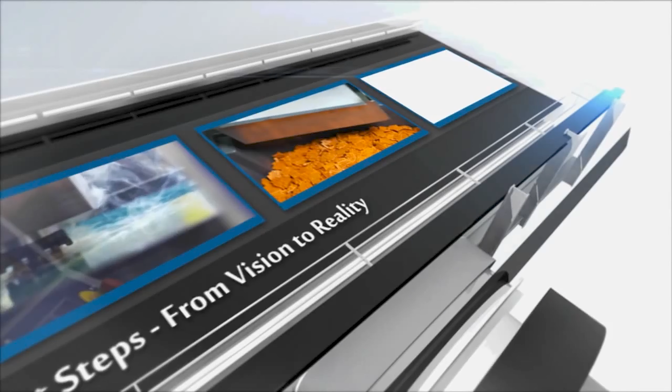Small and medium-sized businesses prefer the term evolution, as technical innovations arise every day in Germany. Innovations are the heartbeat of the German machine and plant construction industry, and Industry 4.0 is already commonplace in production. But let's start at the beginning.

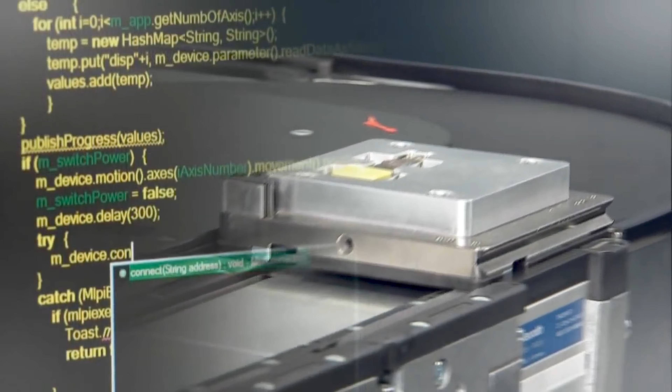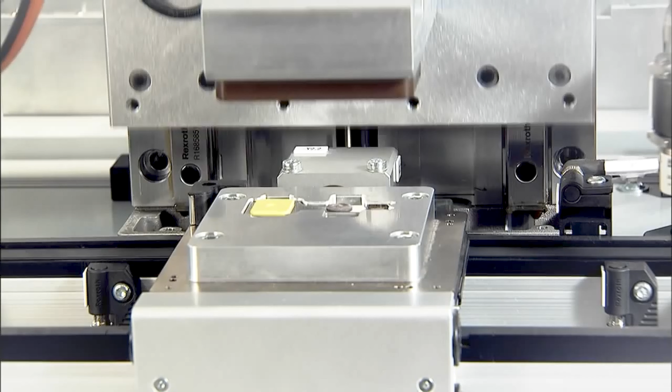Industry 4.0 stands for a paradigm shift. In this demonstration plant of Bosch Rexroth, the final product controls the machines by which it is produced. The key is tagged with an RFID chip, a kind of radio transmitting label wherein all its properties are stored. It now instructs each machine what to do.

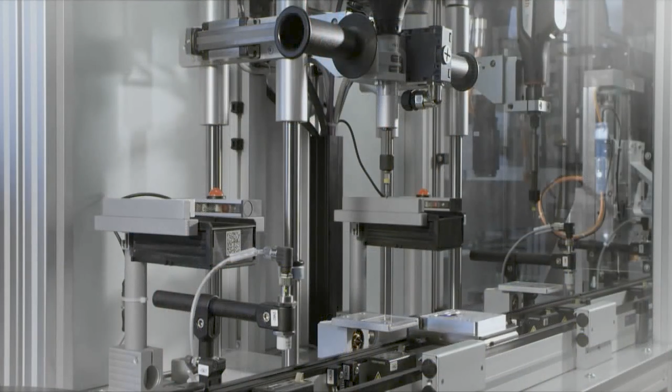That's why our key gets a yellow mark and not a blue one, as for example the key behind it. What looks simple at first glance requires highly complex controls and sensors that significantly affect the entire production.

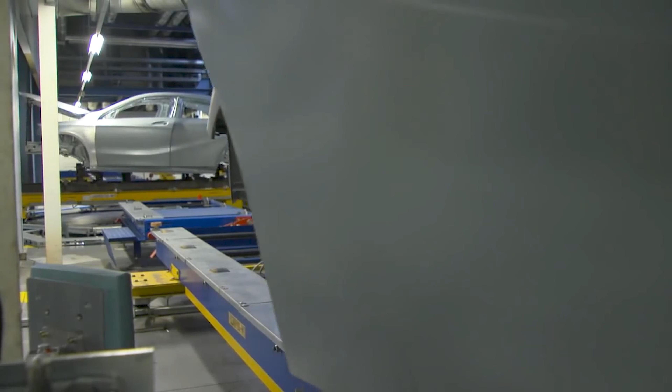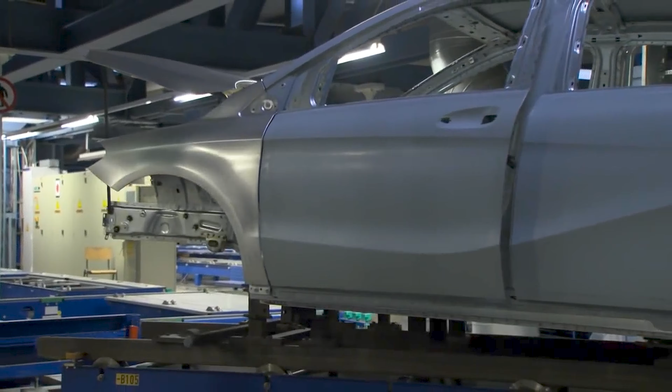In the Daimler-Benz plant in Rastatt, the dimension becomes clear. Here, every vehicle body is RFID tagged right from the beginning. Similarly, all details of the vehicle are stored on it, from the wheel hub to the equipment. Via transponders, the RFID data are queried and new data returned.

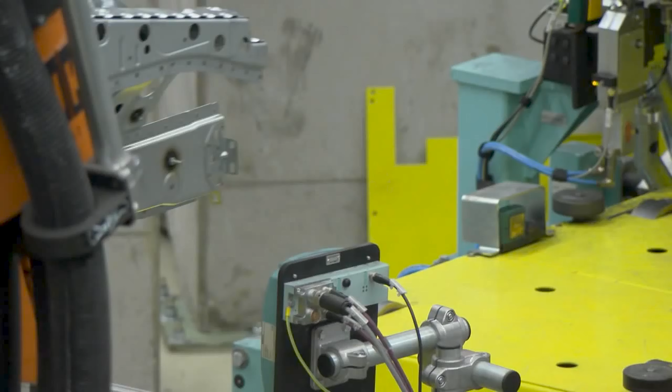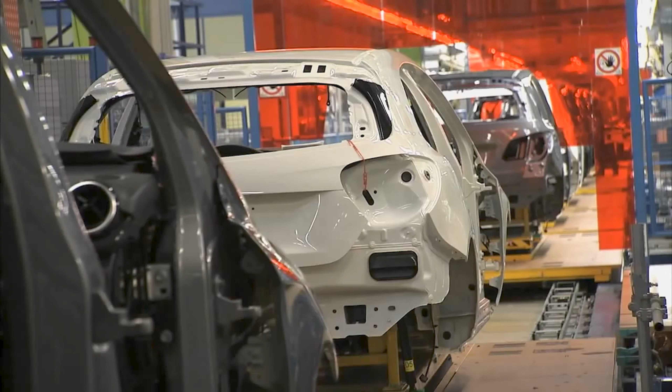The RFID tag is almost constantly updated with current information, indicating to what extent the vehicle has already been completed and what is still missing. The insignificant-looking tag has a lasting effect on the complex interaction of the gigantic production structure. It instructs the robot in the broadest sense what to do next.

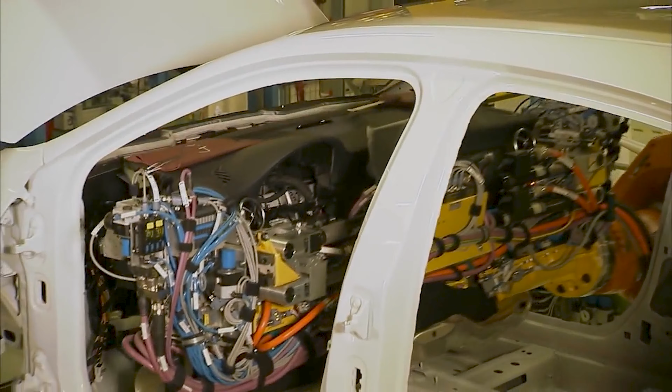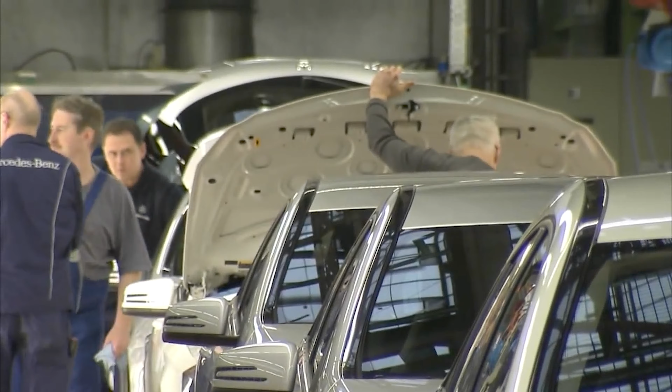In an environment of 1,500 interacting automation units, where 1,200 vehicles roll off the production line every day, the significance of the information in the RFID tag will clearly be comprehensible. It enables and controls a highly productive process. But first of all, technical hardware and software solutions had to be found before everything was able to be running smoothly.

The requirement of the customer in the workshop was a wide reader range of up to 1 meter. This is why we applied the UHF technology for the first time. However, the radio waves are greatly reflected in the highly metallic environment, leading to an impairment of the read results. We could solve this problem by developing special algorithms and integrating them into the reader devices.

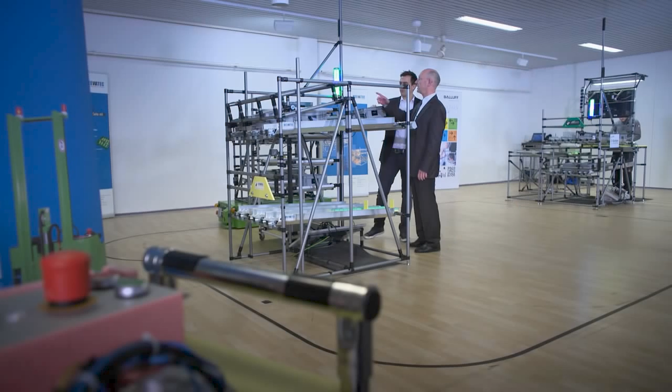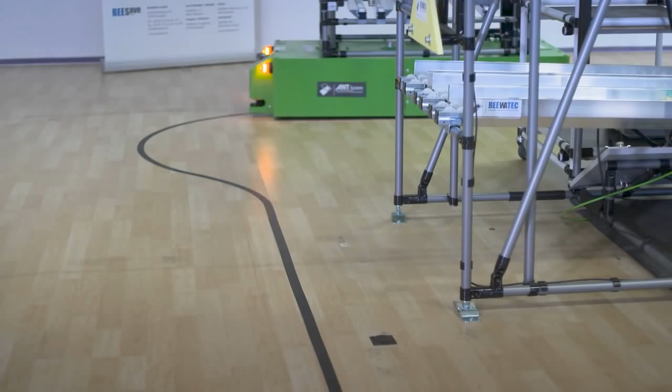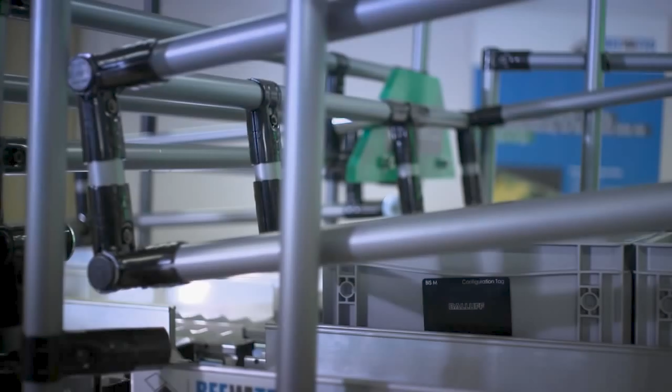But no production can function ideally when the material flow is not absolutely free from error and wrong parts creep in. Fully automatic logistics systems with driverless transport systems equipped with sensor technology provided by Balluff provide the finishing touches here. The integrated sensors check each box and its contents for accuracy. Again, RFID technology is the basis.

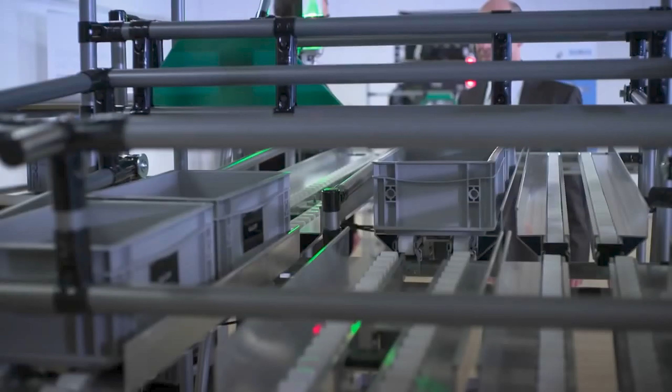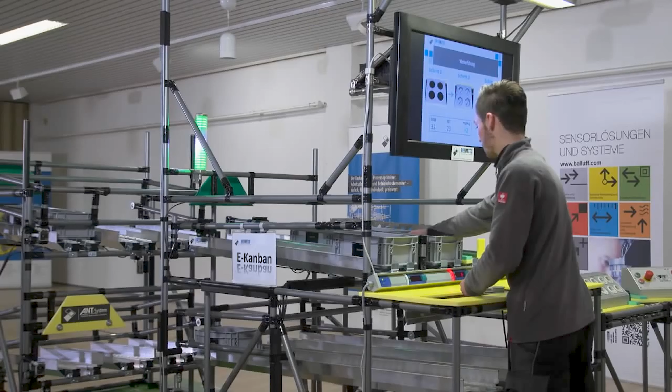In automated production, people and machines are responsible for materials replenishment. As the components sometimes are quite similar, precise control is essential. So, only boxes with the right parts or components arrive at the destination, otherwise they will be stopped and a warning signal given. It's clear that an incorrectly assembled part in a finished product is a bigger and more expensive problem than ensuring correct assembly during production.

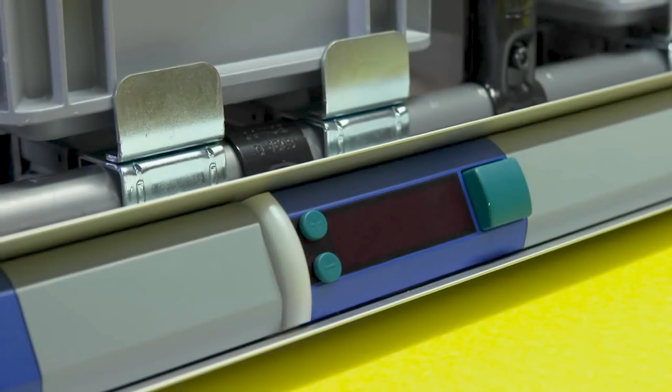The requirements on sensor technology, especially in the context of Industry 4.0, are that we need much more detailed information from the working environment. We must also be able to track goods, as here in this plant. And we need to combine sensor principles that record, for example, temperature or distances.

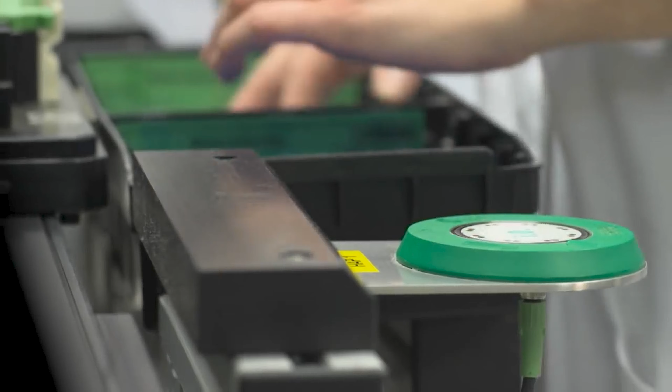At Phoenix Contact, there are RFID chips invisibly integrated that allow a flexible production of one-off items. This ensures that at hybrid working places where humans and machines collaborate, there are always appropriate product-specific instructions. Combined with intelligent control systems, complex production systems can easily be set up and configured by on-site operator teams and needn't be programmed.

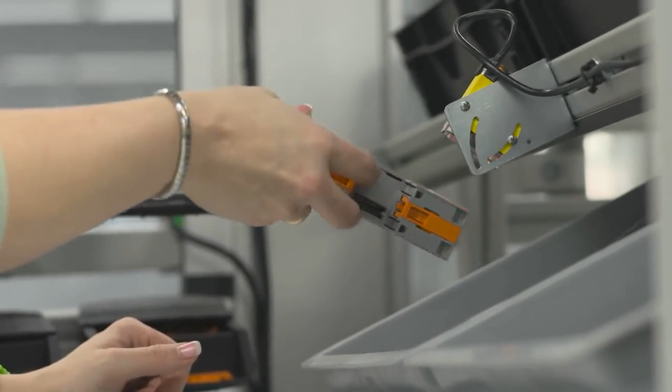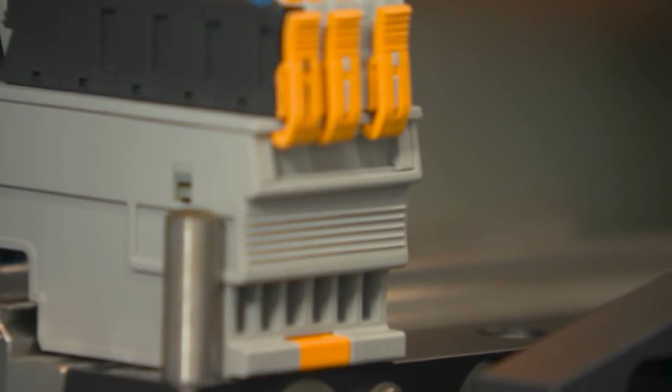With these technologies, it's possible to control manufacturing processes in a situation-oriented manner and adjust them when necessary. The interconnection of the machines in the factory's network allows smooth communication with various IT applications in the company, meaning that production cells, such as labeling processes, can be supplied with the required information in an audit-proof manner at runtime, for example, geometry and process data.

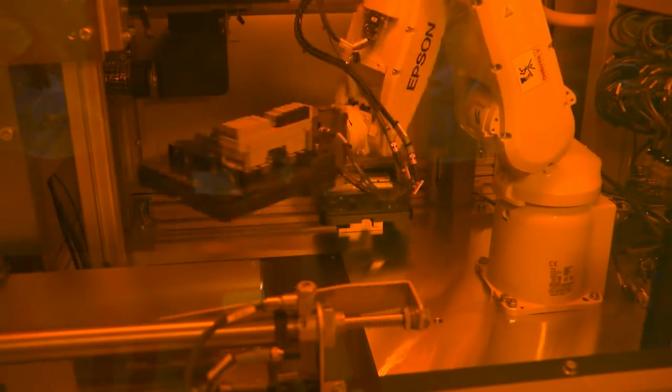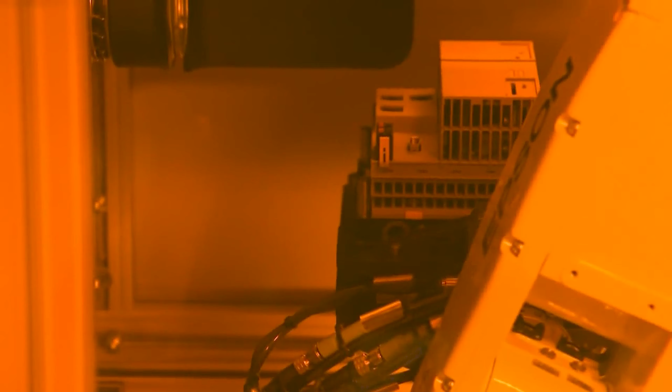This enables the production cells to individually adapt to the next product. Digital product models are used to prepare vision systems and robots during operation for the next task in hand. Industry 4.0 helps to maximize productivity with the maximum flexibility of production without overstressing staff members.

In realizing individual customized mass production, automated production plants have become more complex. The challenge is to enable operators to configure such systems instead of needing experts who program them. It's also essential that the control and IT systems display faults and malfunction information clearly enough for the operator to quickly and efficiently locate and eliminate the cause.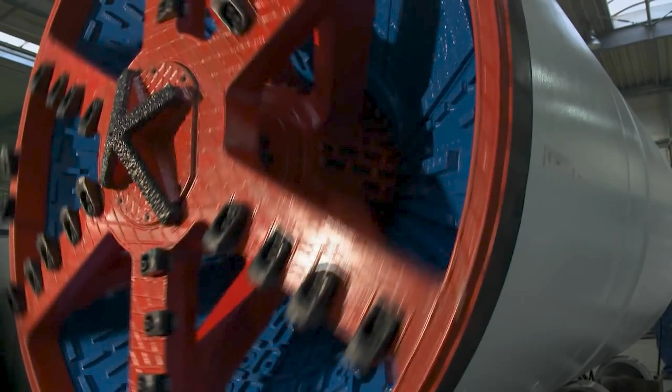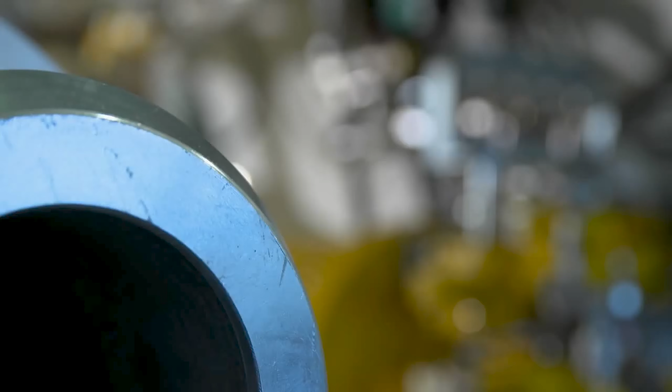For example, this tunnel boring machine from MTS Perforator. It works underground and independently tunnels through the ground. The design engineers understood that a machine meters under the surface is difficult to maintain. It's why they relied on not only high-quality components, but also on robust and resilient control and communication technology provided by Eaton.

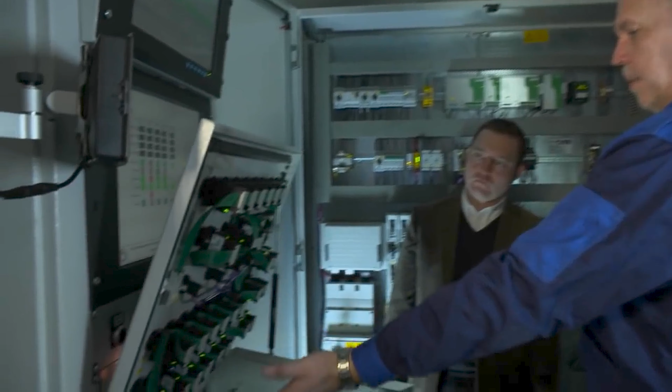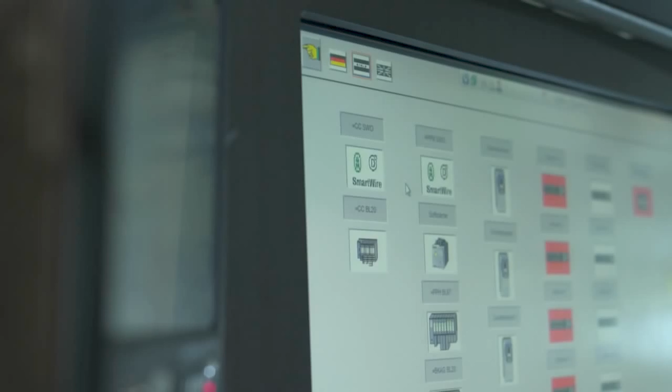These smart devices allow a detailed data access to the control elements from anywhere in the world, so that in the case of malfunction, remote diagnostics can quickly be made and a remedy found. This ensures a high facility availability for end users. It also makes it possible to protect the machine globally from manipulation and prevent danger to users and equipment.

That we can log onto this machine from my office workplace here means we have one communication partner here, and on the machine the corresponding communication partner is installed. After starting both programs, I can access this machine over the internet, allowing me to make a diagnosis. I can find out where the defective parts are, which ones have to be replaced.

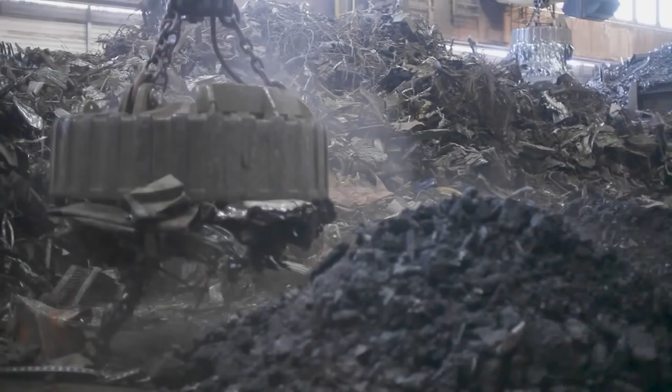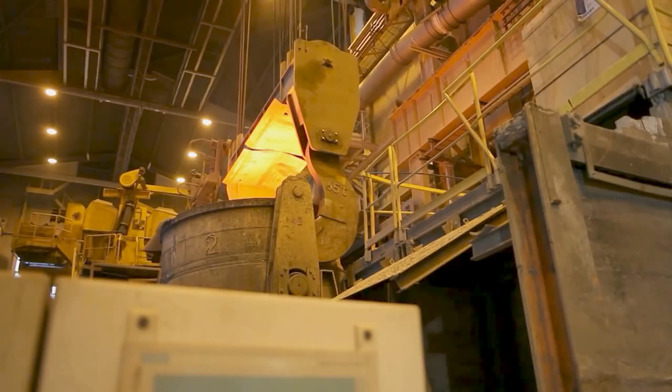Using this information, service personnel can go directly to the machine with the necessary spare parts, or we can advise the customer on site from here, which may allow them to solve problems directly and find a remedy. In industrial processes, secure data lines are becoming increasingly important. Particularly extreme environments such as heat, cold, dirt, or other sources of interference present technical challenges. Corrupt data or an interrupted communication process could have fatal consequences.

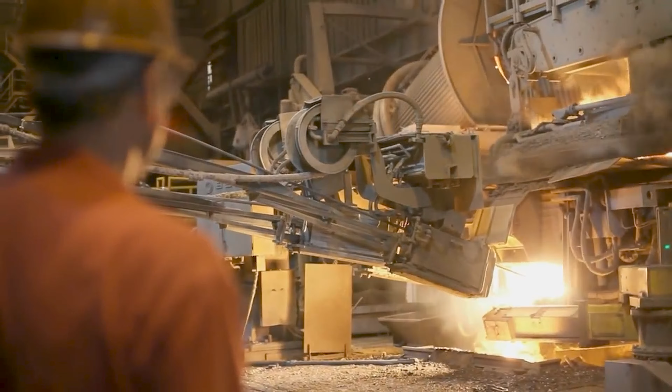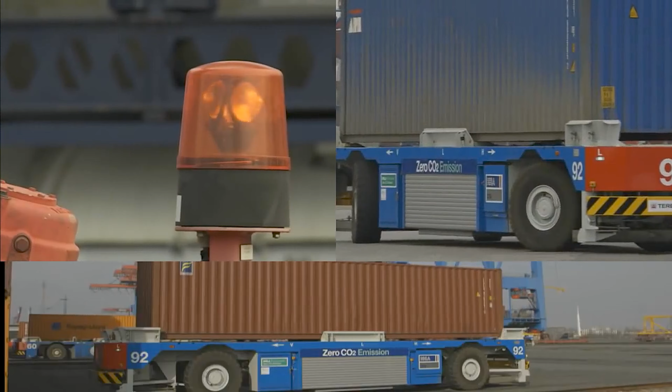The impact a disturbed wireless LAN system could have is evident at the HHLA container terminal Altenwerder in the port of Hamburg. Here, automated guided vehicle systems already control and organize themselves over a wireless network. Heavy containers change their locations independently, as if by magic. They unload and load ships around the clock. Without a fail-safe and protected industrial wireless LAN technology, the self-propelled container transporters would be difficult to control.

For industrial wireless LAN, there are always two aspects to consider. The software aspect, which enables the real-time transmission of data packets, such as Profinet, and the hardware aspect, which ensures that the devices can be used outdoors, for example, under very wide temperature ranges. And the devices are particularly robust, so they can also be used for mobile applications.

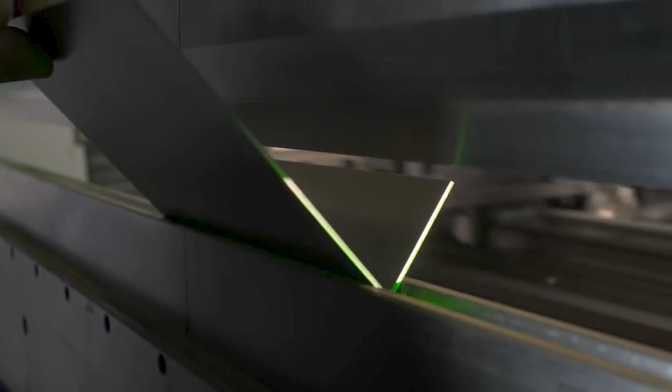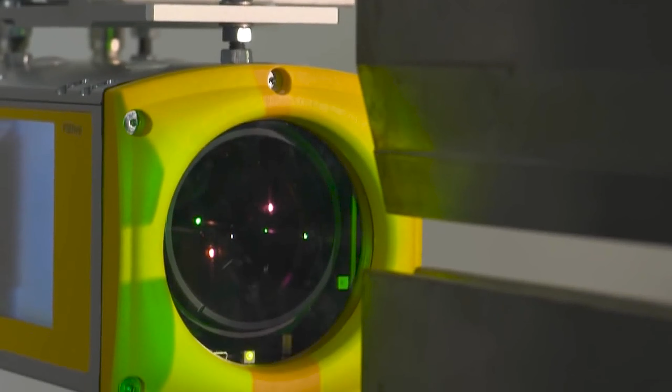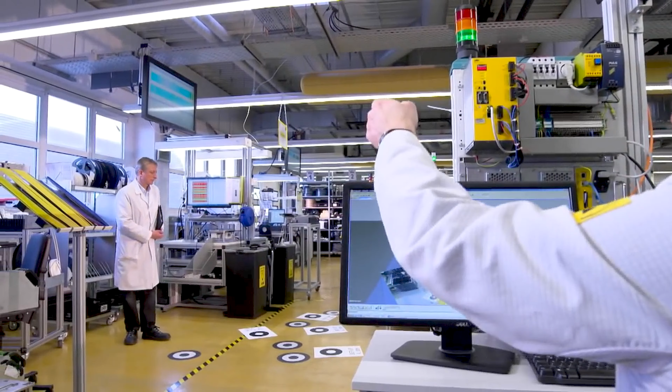Access to the port of Altenwerder is, for good reason, restricted, but the collaboration between human and machine is becoming increasingly important. For example, the folding press stops directly a hand moves inside the danger zone, governed by a camera system using lasers and software image analysis. In more complex facilities too, people need to be protected. With its 3 cameras, the SafetyEYE system from Pilz monitors in 3 dimensions.

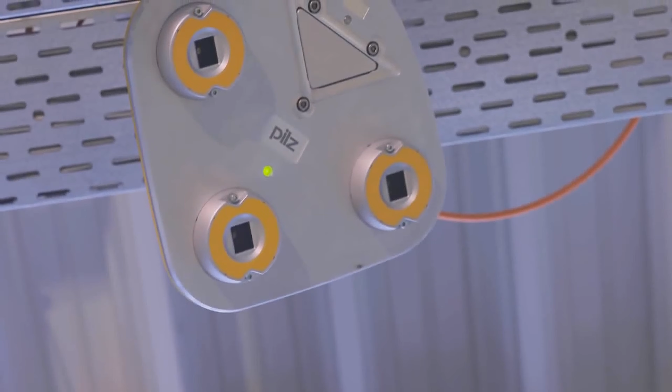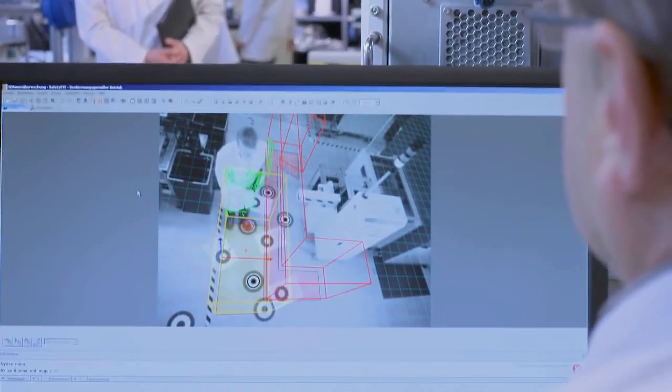In combination with controls, intelligent sensor technology allows new degrees of freedom for the implementation of dynamic processes, allowing working areas to be created where humans and robots can interact optimally, and the safety of the operator remains guaranteed at all times.

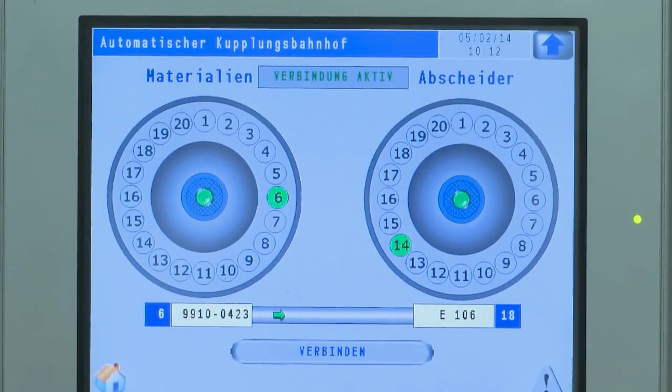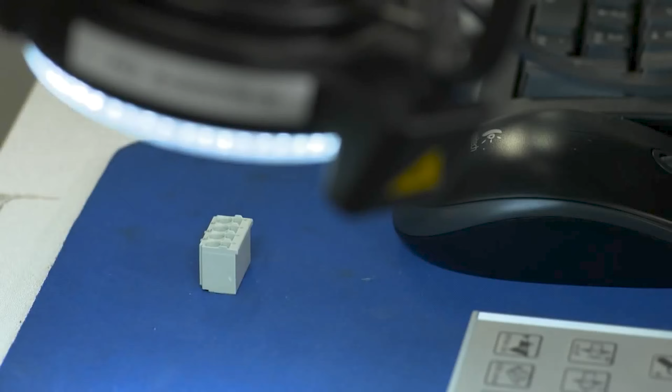The WAGO company operates several state-of-the-art injection molding plants at various national and international locations. Billions of plastic parts are produced here annually. Worldwide, all production sites and all production machines are interconnected. Authorized employees of the company are able at any time to globally query information about all the products, their production output, or about machines of any type and production method in real time. For example, the current order status of each machine and respective quality grade, and the level of efficiency.

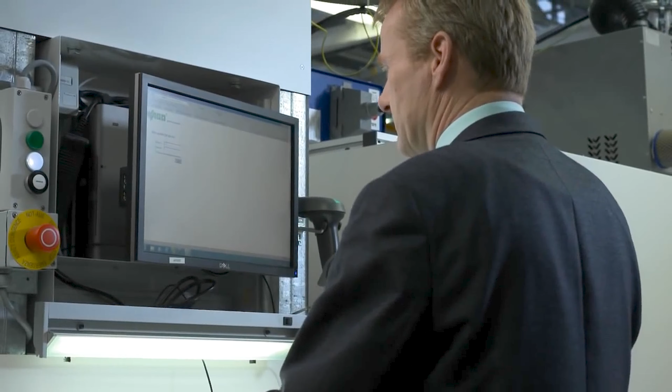Worldwide interconnected IT systems, and in particular the integration of production systems, involves a significant increase in productivity as well as special dangers, for example, virus attacks. Measures for protecting the system, summarized by the term security, are a continuous task. The effort required is often significantly underestimated.

The particular challenge for us as a company is not only to analyze our processes, but also to ensure that our processes can only be influenced by well-qualified personnel. We achieve this by securing our entire machinery and equipment with RFID technology, and don't use password levels anymore. Passwords can be learned by anyone. RFID transponders are only owned once by each employee.

Software, hardware, and communication are the triad of Industry 4.0. The entire production chain is controlled and documented, with the highest quality and productivity. But when will Industry 4.0 be broadly implemented in manufacturing industry? In my opinion, Industry 4.0 will become reality when the meaning and purpose of Industry 4.0 is no longer discussed, but it becomes a matter of course for flexible collaboration between ultra-modern factories and value-added networks, using the latest information and automation technologies. Perhaps then we will realize in retrospect that a revolution has taken place.